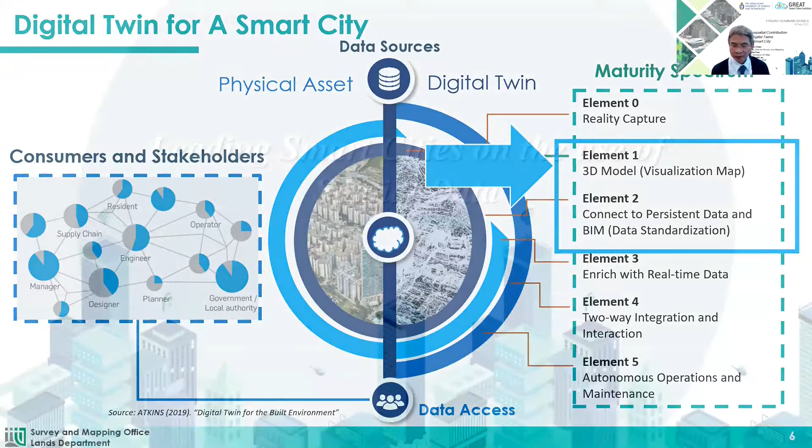Now we go on to discuss how we could use spatial data to help smart city development.

The Institute for Management Development, in collaboration with Singapore University of Technology and Design, has released the 2020 Smart City Index with key findings on how technology is playing a role in the COVID-19 era in a way that is likely to remain.

Hundreds of citizens from 109 cities were surveyed in April and May last year and asked questions on the technological provision of their city across 5 key areas: health and safety, mobility, activities, opportunity, and governance of a city.

Singapore, Helsinki, and Zurich came top in the 2020 Smart City Index. The Smart City Index ranked cities based on economic and technological data, as well as citizens' perception of how smart their city is. Hong Kong was ranked 32nd in the list.

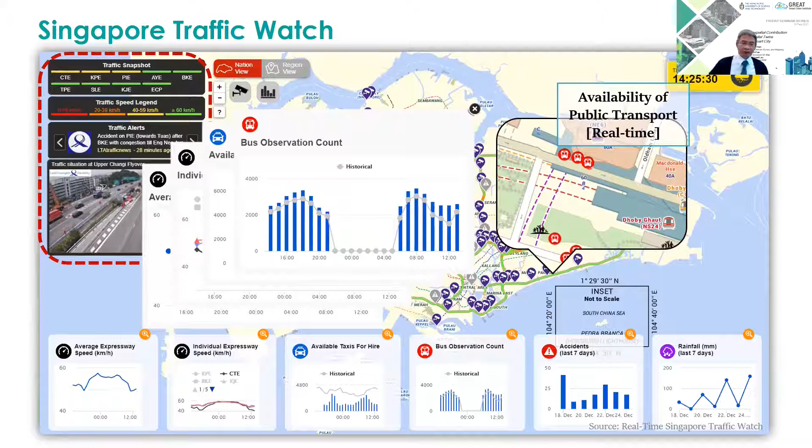In Helsinki, a Maps service shows the most suitable living areas for families with children. The easy-to-use service provides users with access to real estate listings in the desired area, transport links, as well as much-needed information on available services for families with children, such as nursery, schooling, and recreational space.

Helsinki also makes use of spatial data to monitor air quality, highlighting streets with high NO2 values, and maps showing high pollutant areas.

Zurich makes use of spatial data to support recycling. A recycling map collects over 12,000 collection points for users to identify the location of suitable collection points with different types of recycling materials.

Over 85% of data have their location attribute, which means where such data is. The value of data can be greatly enhanced if they are referenced with their location, what we call geo-reference or geo-enabled. With different kinds of geo-reference data hosted in the same platform, it supports not only search of required information, but also information analysis and exploration of new knowledge.

This diagram shows multiple spatial datasets that are required for the development of a common spatial data infrastructure.

We also need a 3D digital map to host the spatial data. Spatial data, based on agreed standards, could be stored, searched, shared, explored, assimilated, and analyzed, serving multiple purposes of different sectors.

In the Smart City Blueprint 1.0 released by government in 2017, there's a chapter on smart government with a diagram showing the generic digital framework for smart city. This framework provides the fundamental technical capability upon which smart city services will be built. Common spatial data, together with big data and open data, are considered in the data layer of this digital framework.

3D digital map is included in the government's CSDI initiative. As I mentioned previously, we need a 3D map or 3D city model to host various kinds of geospatial data.

Lands Department is developing the 3D digital map in three stages, including 3D maps for visualization, 3D maps for unit-based indoor application, and 3D maps for city modeling.

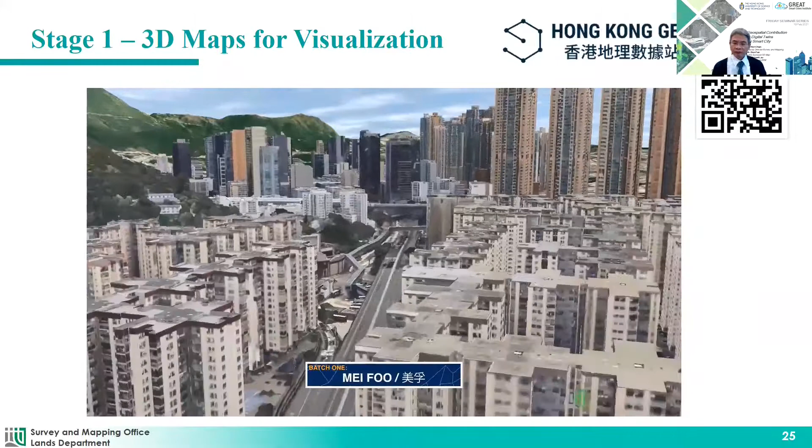The first batch of the 3D visualization map, the mesh model, was released as open data to the public on the Hong Kong Geodata Store in December 2019.

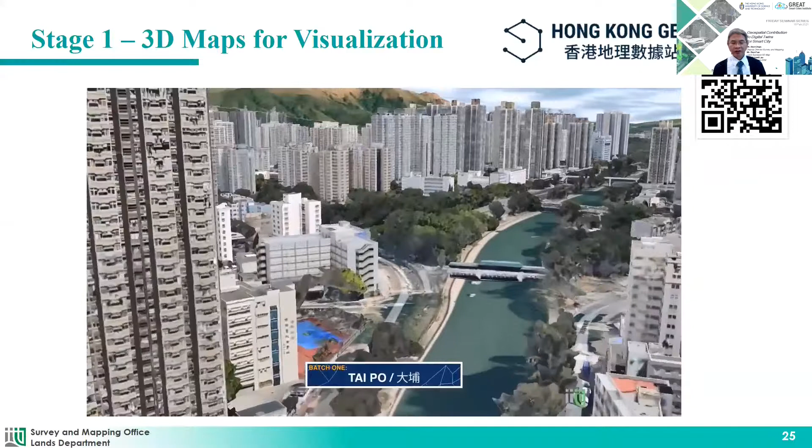By year 2023, the 3D visualization map covering the whole Hong Kong territory will include features like individualized buildings, not only a mesh layer of visualization but individualized building models - quite a lot of work on this.

By year 2023, the 3D visualization map covering the whole Hong Kong territory will be available to the general public. More details about this 3D digital map development will be presented by my colleague Ben Fan, who is working on the 3D digital map project, in the second part of today's presentation.

Another part of today's presentation is about BIM development. Government has planned to undertake various activities for the adoption of BIM technology by multiple departments. Acceptance of BIM format in building plan submission will be handled by Buildings Department and Lands Department.

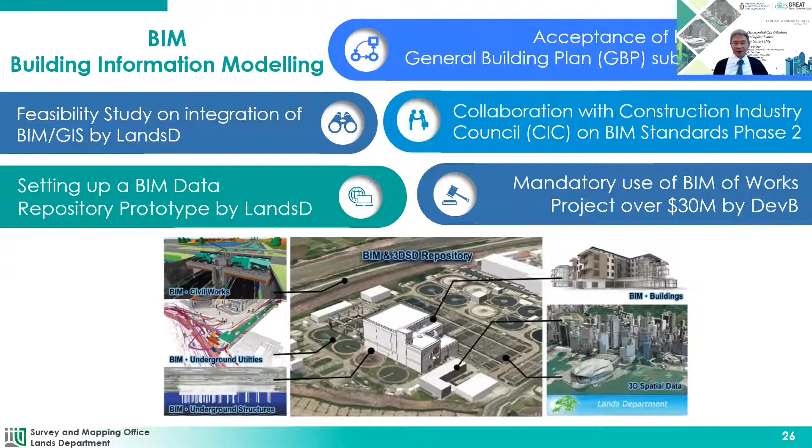BIM and GIS integration, and the BIM data repository set up by Lands Department, with a prototype or pilot in the CEDD NDA project, and also collaboration with CIC, the Construction Industry Council, on BIM standards and mandatory use of BIM in all works departments.

In Technical Circular Works Number 12/2020, which you could download from the Development Bureau website, it sets out the policy and requirements on the adoption of BIM technology, and mentions that works departments shall provide their design and as-built BIM models to Lands Department to facilitate development of the BIM data repository, and shall ensure the models are prepared for information sharing according to a harmonized BIM standard.

This harmonized BIM standard is being developed together by CEDD, Civil Engineering and Development Department, and Lands Department in a pilot project for a new development area, due for completion this year.

This consultancy service led by CEDD on the Kwu Tung North, Kwu Tung Bak, and Fanling North new development areas defines the BIM data harmonization among works departments, and will serve as a set of guidelines for future BIM data standards in public works. You could see lots of works departments participating in this project.

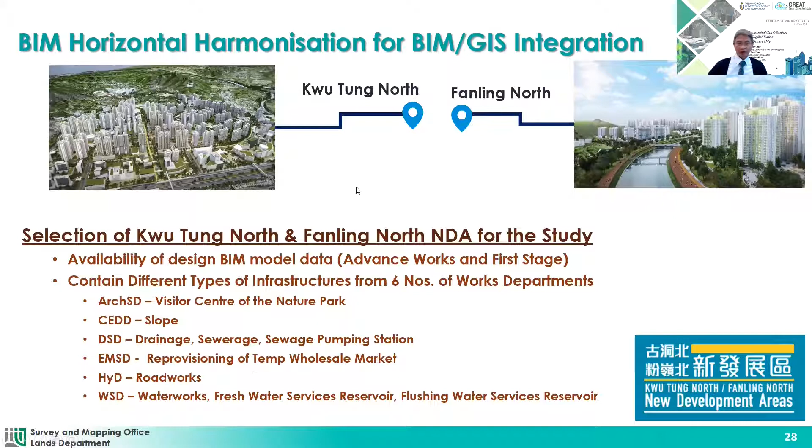The establishment of the BIM data repository system would facilitate the sharing of BIM data among different works departments, and could also improve collaboration in planning, lands, and works applications.

For the planning and management of our BIM data repository development, Lands Department has recruited a professional consultant, a quite renowned consultant, BIM Score, who is experienced and proficient in open BIM adoption and development, to recommend a roadmap of BIM data repository for Lands Department and government.

In addition, data standard, data format, and system functionality, and also proof of concept for BIM and GIS integration are also included in this consultancy.

More details about our BIM data repository and other BIM-related projects will be presented by my colleague Michael Lau, who is working in the BIM project management team, in the third part of today's presentation.

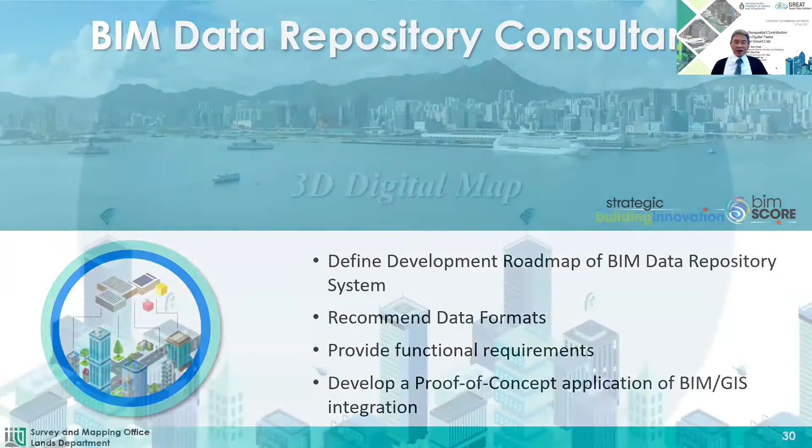Now my colleague Ben Fan would share with you details about our digital map development. So let me pass the screen for his sharing.

Thank you all for joining today's seminar. My name is Ben Fan. I'm a land surveyor from the Lands Department, and I'm now working on the 3D digital mapping project.

The 3D digital map, which is one of the building blocks of CSDI, is to facilitate opening up and sharing of government geospatial data.

When we talk about 3D digital maps, there is an article written by Professor Jantien Stoter, who is from the Delft University of Technology in the Netherlands. In this paper, she presents the state of the art of 3D city modeling in the context of broader developments such as smart cities and digital twins.

And it outlines six challenges that must be overcome before 3D data as a platform becomes a reality. They are consistency between models, standardization, data quality, data interoperability, data maintenance, and moving from utopian pilots to real-world use cases.

In order to allow for the development of advanced applications, a 3D city model should describe the geometry and attributes of all the individual elements typically present in a city, for example buildings, infrastructure, roads, water bodies, etc. In addition, relevant semantic information can be included with the geometries, such as the year a building was constructed, the number of people living in it, and the construction materials. All this information is important to optimize circular economic flows or energy consumption.

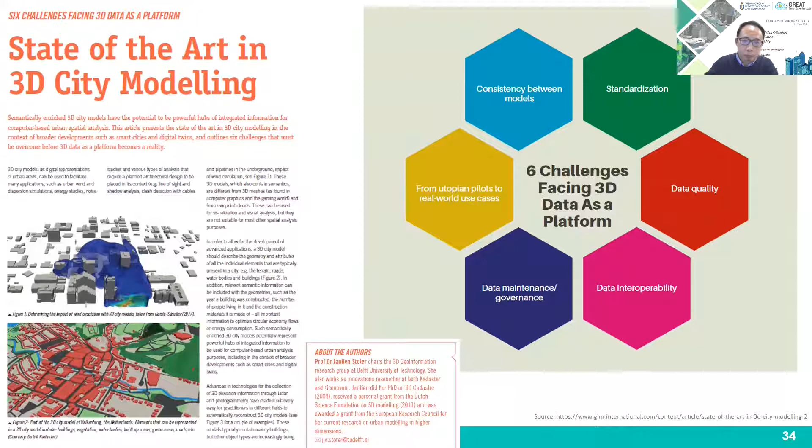The Surveying and Mapping Office of the Lands Department is the official land surveying and mapping agency for Hong Kong. We produce various types of maps and plans following the adoption of metrication policy in the early 1970s. The SMO has covered more than 3,000 sheets at 1 to 1,000 scale, and this 1 to 1,000 2D topographic map is the largest scale topographic map surveyed and plotted by SMO.

It shows a wealth of information with spot heights and contours—more than 200 map features of different kinds were defined, specified, and presented in this map. It proves very useful for many different kinds of applications, for example engineering, town planning, land administration, and industrial purposes.

So as we evolve digital maps from 2D to 3D, there are a number of aspects we have to pay attention to. For example, we have to invite international experts to develop international or national mapping standards, such as the OGC standard. We also have to do market research to find out the state of the art and technology available for 3D mapping now in the market.

And we also have to interview stakeholders, especially Hong Kong industry stakeholders, focusing on use cases, to make sure the 3D digital map development is practical and can be applied to real-world use cases.

In the future, the ultimate target of 3D digital map development is to provide an object-oriented 3D city model with a comprehensive 3D GIS database. This should be a completion of an advanced 3D digital map with thousands of standardized 3D map features, with intelligence and sufficient detail and accuracy in the form of 3D GIS, supporting the six aspects of smart city applications in Hong Kong. Of course, achieving this target is challenging, and there is still a long way to go.

There is a report from the United Nations called Future Trends in Geospatial Information Management: the 5 to 10 Years Vision. This shows how geospatial information and technology underpin national governments, and documents the increasing role that geospatial information will play as an important part of the 2030 Agenda for Sustainable Development and its 17 goals.

This report has been authored by Great Britain's Ordnance Survey National Mapping Agency, and it looks in depth at the challenges and opportunities that will impact how we connect, manage, and use geospatial information over the next 5 to 10 years. A lot of insight could be found from this report.

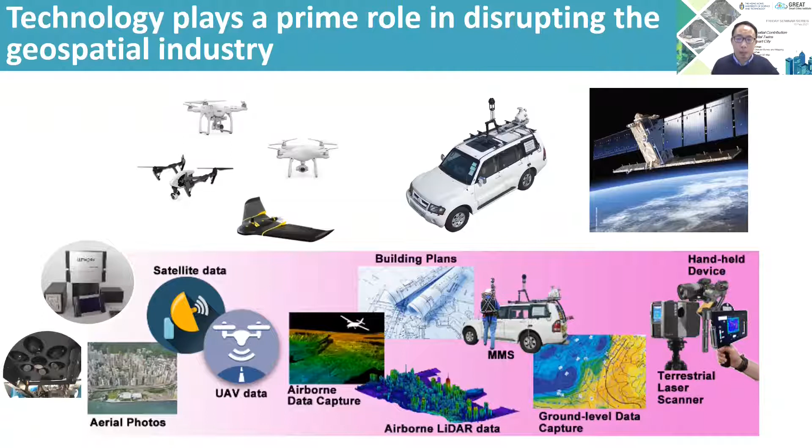Technology is the answer, but what was the question? It is always worthwhile heading back to British architect Cedric Price's famous quote in 1966, when thinking about building a smart city and what use cases of 3D maps could be achieved based on modern technology.

In fact, OGC has listed the top-level use cases of CityGML models, which can be divided into 5 main goals: archive, the creation and use of the model for the purpose of preservation of the former and current state of an environment; and visualization, generation of views of the model environment in 3-dimensional.

There is no doubt that visualization is often the best way to convey the overall nature of the model environment in 3-dimensional. You may have seen a movie called Blade Runner 2049, which displays a future vision of Los Angeles. In this film, all the 3D models created make use of realistic texture based on aerial and oblique photos, using GIS to depict the future vision of Los Angeles in 2049. This movie also won an Oscar for best visual effects in 2018.

So visualization is not only for popular engagement or simple analysis, but also for many different kinds of industries. The third use case is navigation, the guidance of people or vehicles through a model environment. Semantic structure enables both route-finding and guidance in terms of object categories that are directly meaningful to humans.

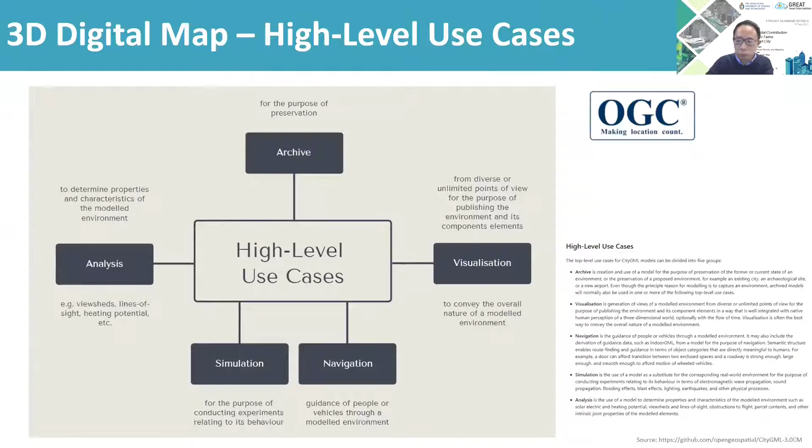Generally, 3D city models appear to have been predominantly used for visualization. However, as mentioned before, today they are being increasingly employed in a number of domains and for a larger range of tasks beyond visualization.

There is a paper written in 2015 by Dr. Filip Biljecki, a CityGML modeling expert and graduate from Delft University of Technology, now working as an associate professor in the National University of Singapore. In his paper, he documented the state of the art regarding the utilization of 3D city models across multiple domains based on a comprehensive literature study, including hundreds of research papers, technical reports, and online resources.

This paper demonstrates that 3D city models are employed in at least 29 use cases that are part of more than 100 applications. The potential use of 3D city models is immense and only limited by our imagination.

Consumers rely on the accuracy of the position and navigation capabilities of their mobile phones. However, we all know that multipath exists in urban canyons, especially in the Hong Kong situation. The biggest location issue is inaccuracy in dense urban areas, such as wrong side of the street with many skyscrapers. Lately, Google has improved Android's urban GPS accuracy using 3D building models as reference for GPS corrections.

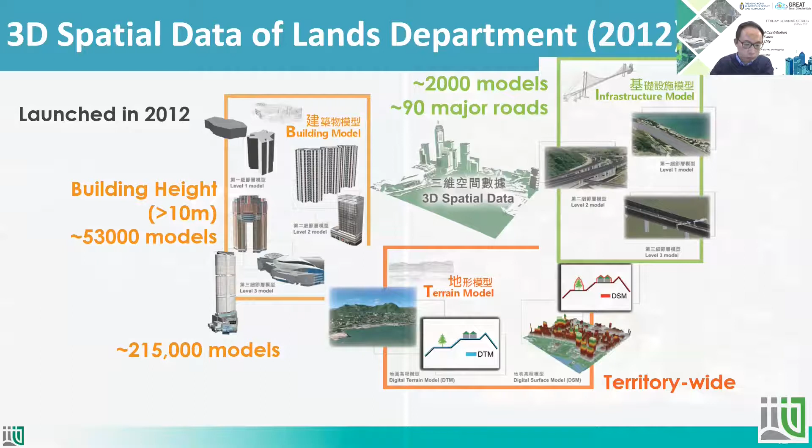Let me ask one question. Do you know how many 3D building models from this 3D spatial data set were created with photorealistic textures and represent as a miniature of the building? Are they all 100% photorealistic, or 15%? In fact, the real situation is less than 10% of this 3D spatial data set are photorealistic, meaning more than 90% of these 3D building models are in fact 3D building blocks without texture.

So this is the current situation when we talk about the 3D individual building models, what we have right now in Hong Kong, or in Lands Department.

As mentioned, the 3D digital map, which is one of the building blocks of CSDI, is to facilitate opening up and sharing of government geospatial data. To meet the increasing needs of 3D digital map applications and better understanding of multi-level spaces of modern cities like Hong Kong, the government aims to develop the high-quality 3D digital map by phases and strives to cover the whole territory by the end of 2023.

This 3D digital map project consists of three parts. The first is the full-fledged 3D visualization map. The second is the 3D indoor map for 1,250 buildings. And the third is the 3D pedestrian network.

This initial set of 3D visualization map covers the Kowloon area and also the built-up areas in the New Territories. Only 20% of the area is covered so far from this data set. The government aims to develop the high-quality 3D digital map by phases and will cover the whole territory with a full-fledged 3D visualization map by end of 2023.

How about Singapore? In 2016, they did 3D national mapping using aerial oblique images, and the same year they also surveyed the whole country at street level. In 2018, they built a Virtual Singapore platform with abundant 3D spatial data for different kinds of smart city applications. As Spencer mentioned at the beginning, Singapore ranked number one in the Smart City Index in 2020.

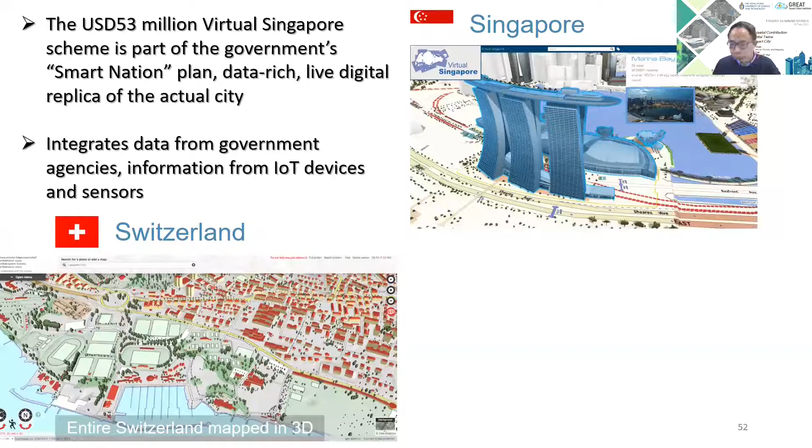They also integrate data from government agencies and information from IoT devices and sensors, in various 3D formats including CityGML. In Switzerland, the one and only country so far to have switched entirely to 3D for its national object-oriented topographic database—according to the Swiss Federal Office of Topography, Swiss Topo, they spent 10 years building this 3D object-oriented topographic database, with the last objects completed in 2019. Swiss Topo notes this whole-country 3D object-oriented database created low extra cost and many benefits for them.

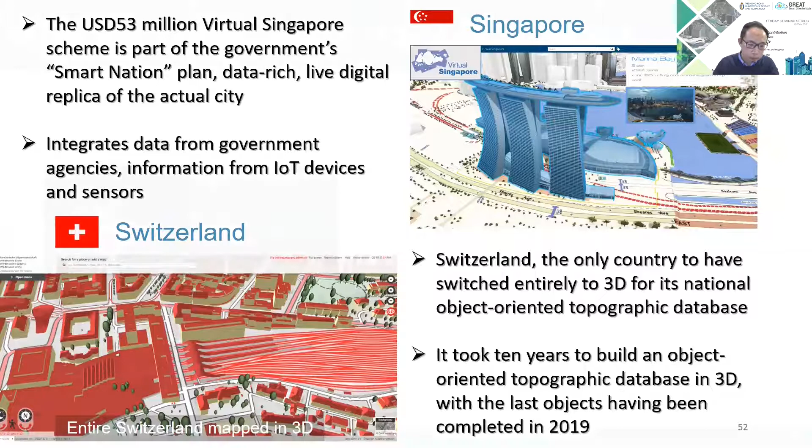And how about mainland China doing in 3D mapping? In fact, many major China cities have already created 3D photorealistic models. From the perspective of Professor Li Deren, a very famous expert in photogrammetry and remote sensing in China, he thinks that China is mature enough to develop a whole country 3D photorealistic model.

The whole country covers an area of 9.6 million square kilometers. He thinks that this is a good time to build the whole country's 3D photorealistic models.

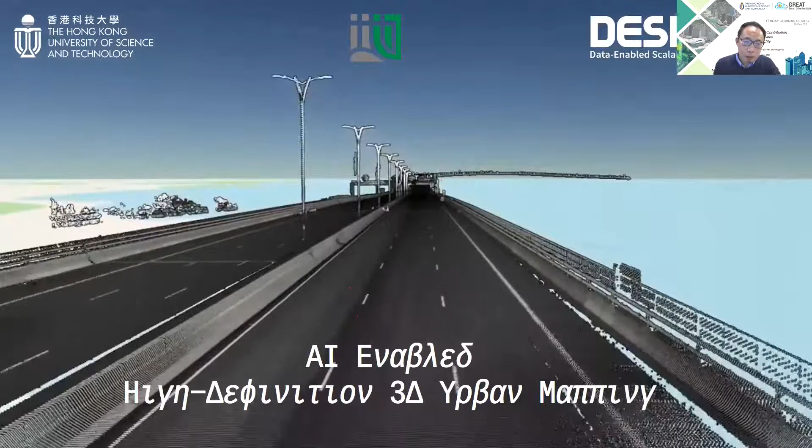We gave a trial study to HKUST's DESI lab, courtesy of Professor Wen. They are using artificial intelligence to detect our MMS point cloud data so that all features can be extracted automatically in a very short time. This is very efficient and very intelligent.

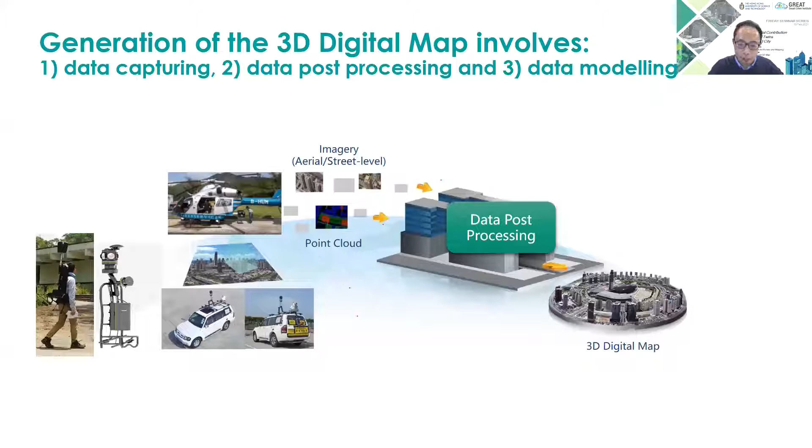Generation of the 3D digital map will involve data capturing, data processing, and data modeling. We strive to organize and apply the best of our energies and skills to do that. The aerial photos, on-ground captured images, and laser scanning point clouds will be processed to generate 3D photorealistic models to represent the shape, appearance, and position of various types of features, including buildings, infrastructure, and terrain.

From the consultancy study, three key strategies were identified: incremental implementation, outcome-based rather than output-based approach, and setting out best practice and examples.

Incremental implementation means various aspects of digital mapping and technical capabilities can be tested using the current pilot area project before full-scale implementation. Lessons learned and experience gained from this can be carried forward into development of other regions. So in the current pilot area, we will develop the 3D digital map in two stages. Stage 1 is to create the 3D photorealistic models, and stage 2 focuses on the semantic models, aligned to the international standard, that is the OGC CityGML standard.

Outcomes-based, not output-based: the mapping product would address user expectations and provide deliverables to directly address applications of 3D spatial data by wider users. So the 3D digital map we provide will focus on use cases, not just a single product that people don't know how to use. More applications are shown in the following video.

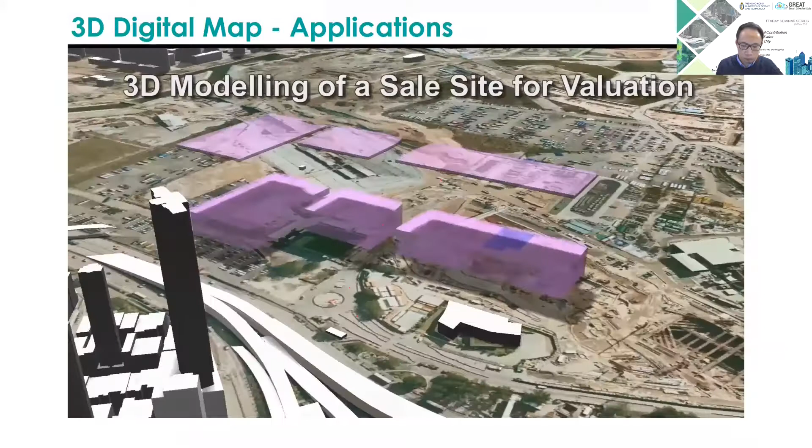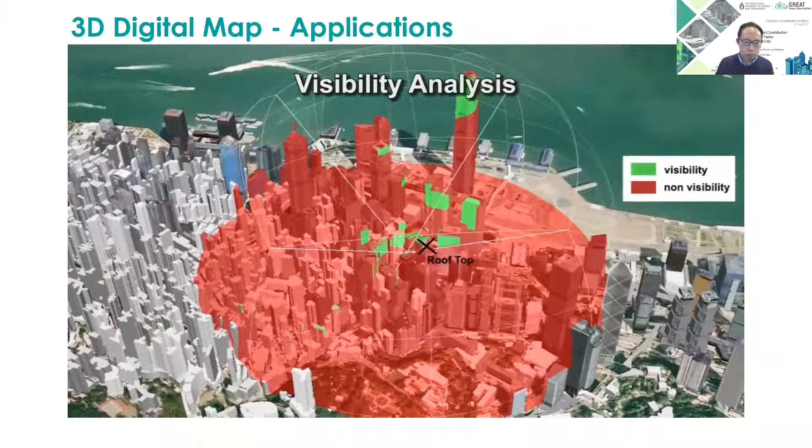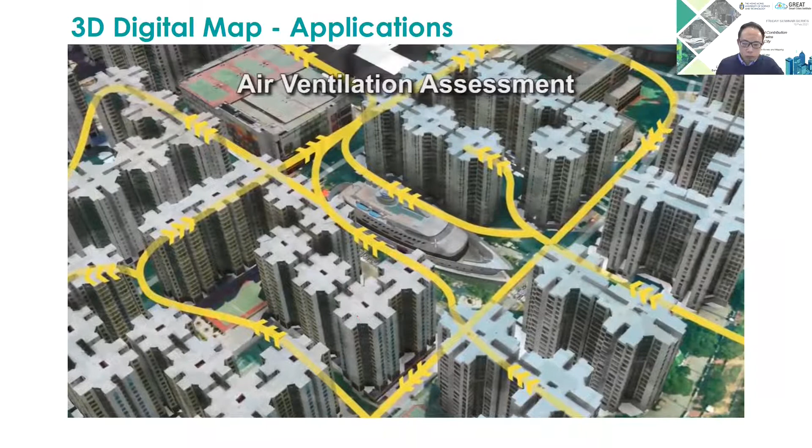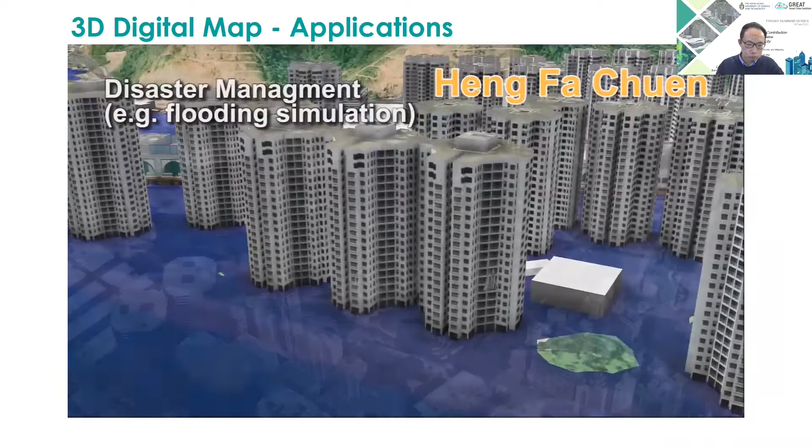Introducing 3D applications: 3D modeling for site valuation, estimation of solar irradiation, transportation and navigation, classifying building types, visibility analysis, estimation of shadows cast by urban features, estimation of noise propagation in an urban environment, city planning and design, reconstruction of sunlight direction, emergency response, lighting simulations, air ventilation assessment, routing, disaster management such as flooding simulation, green space assessment, underground modeling, telecommunication placement, and land valuation.

Setting out best practice: the 3D digital mapping technical specification intends to ensure standardized and consistent quality of output using best practice standards. This experience gained from the Kowloon East pilot project provides an opportunity to reach out and participate in related organizations for further development in various aspects of 3D related applications.

Our goal is to complete the project for the whole territory of Hong Kong by 2023. That challenge is one we are willing to accept, willing to face, and intend to do the best we can.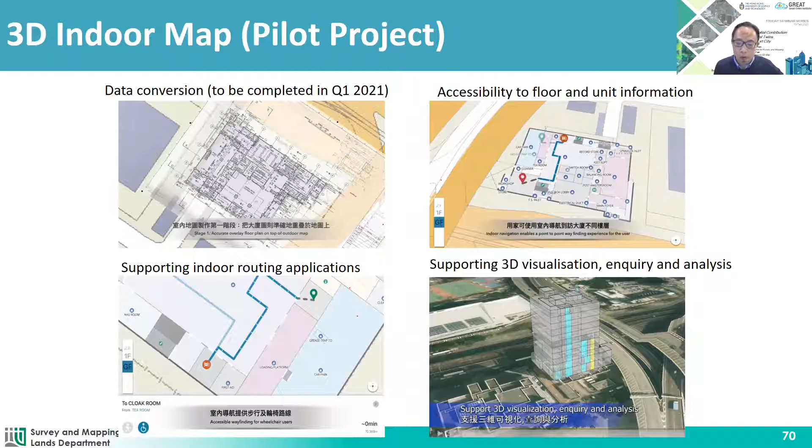This will also serve as a reference for further developing the 3D indoor map for 1,250 buildings by 2023. Major government, institution, and community facilities, for example government offices, hospitals, community halls, schools, clinics, and landmark buildings that are accessible to the public, will be given priority in the list.

Let's take a look at the video to show how we create a 3D indoor map. In fact, we are using building plans. All these building plans come from the Buildings Department, the Architectural Services Department, or the Housing Department. We use these building plans to digitize into 3D form, 3D units, and also generate the 3D indoor network.

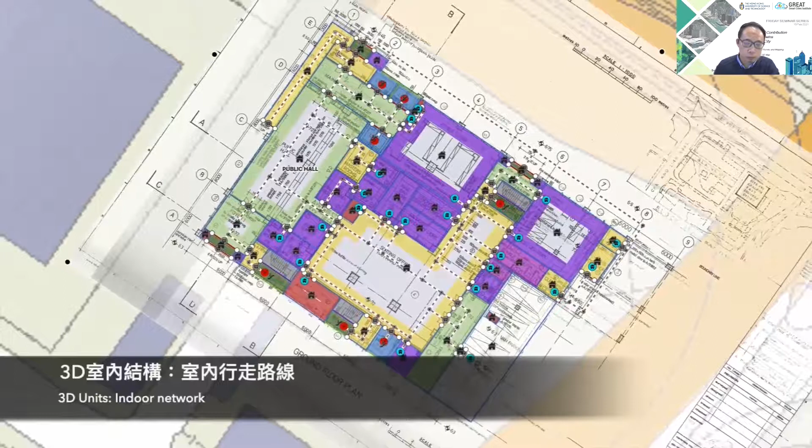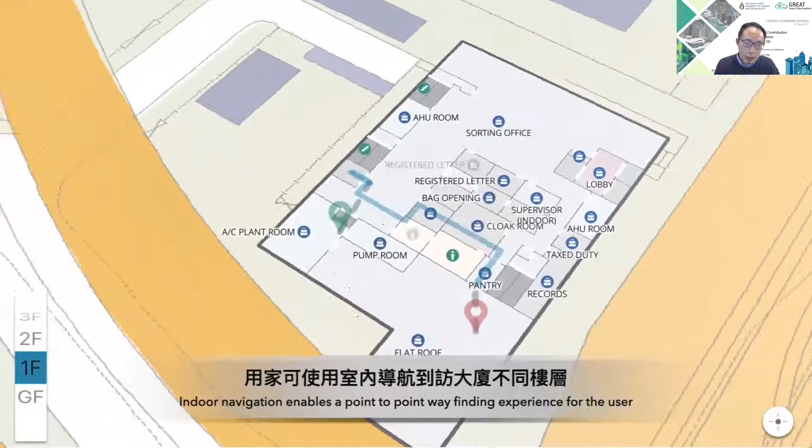This 3D indoor map supports navigation. Navigation enables point-to-point wayfinding, not only for the general public user, but also for people with disabilities or visual impairment. This 3D indoor map also supports a mobile version, so that if you bring a mobile device into the indoor area, you can navigate as you want.

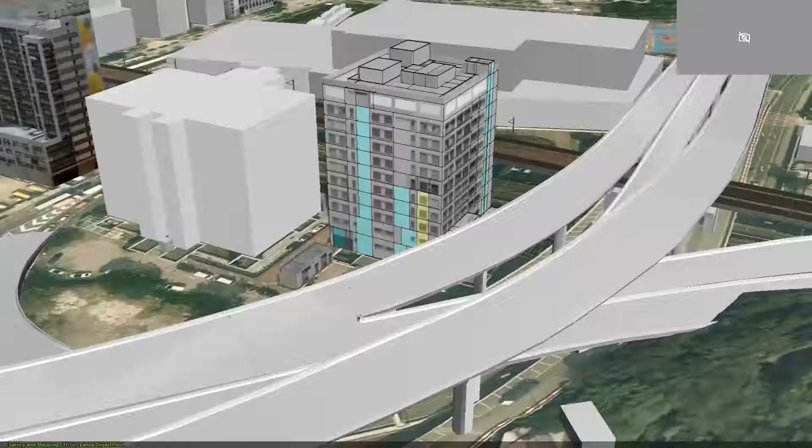And this is not only 2D. In fact, this 3D indoor map is fully supported to present in 3-dimensional. So different kinds of 3D visualization, inquiry, and analysis for this 3D indoor map are already supported.

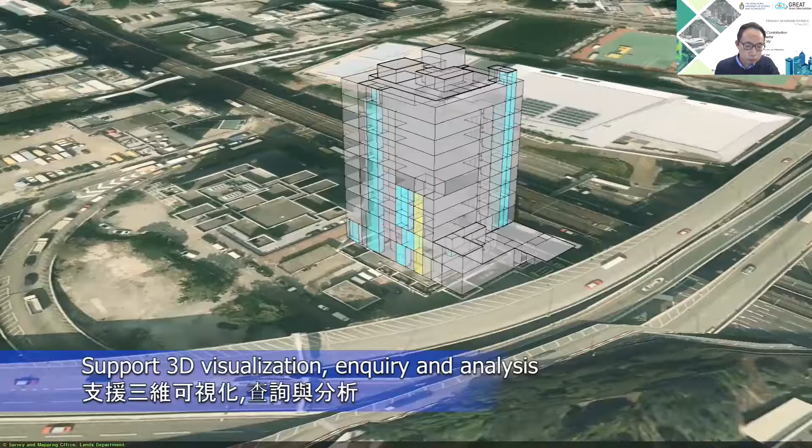Any attributes or related asset information related to the unit could be linked to this 3D indoor map to facilitate different kinds of indoor map location-based applications. Of course, there are many different kinds of potential applications, for example, integration with IoT systems. We create a 3D indoor map of the site or building with real-time sensors using IoT technology, and they can easily directly link the sensor with their asset information to do facility maintenance or other kinds of building analysis based on the 3D indoor map.

Also, there are many different kinds of applications empowering use cases on top of 3D indoor maps. For example, for people with disabilities or people with visual impairments, for smart mobility, for new site location-based analytics, or for fire evacuation emergencies, or for building management or facility management to improve operating efficiency.

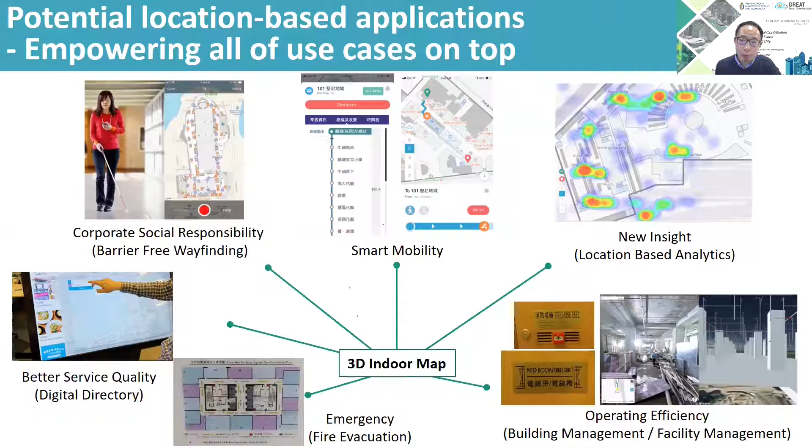In line with the Smart City initiative of promoting walkability and connectivity, the 3D pedestrian network was designed to support navigation services and meet the special needs of people with physical disabilities. The Transport Department's HKeMobility mobile app has already adopted the above 3D pedestrian network to enrich mobility information.

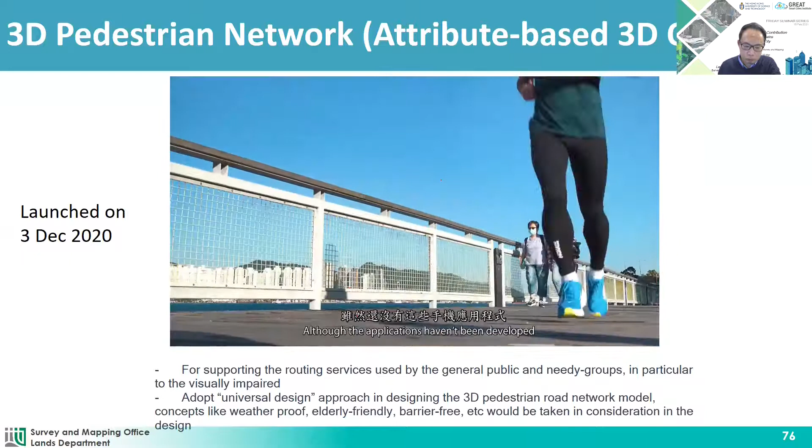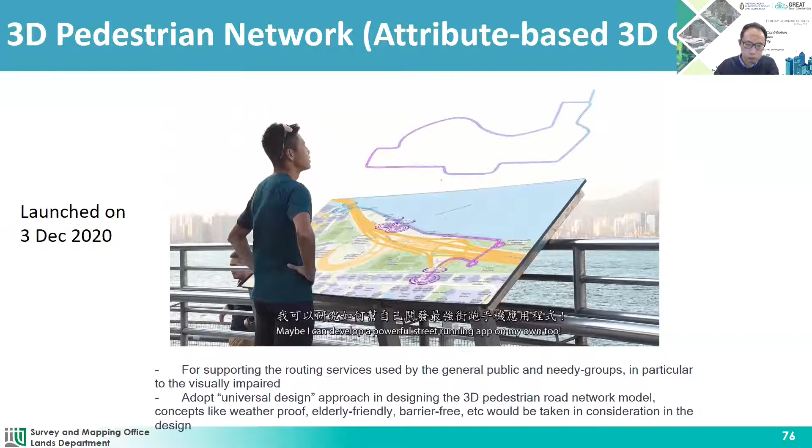The first one is 'everything happens somewhere,' the new wave of data creation. Over the next decade, the technologies and data creation methods that will have the greatest impact on the geospatial industry are mobile data collection methods, crowdsourcing for real-time data collection, and social media platforms.

Second is aerial mapping. Traditionally, we use aircraft equipped with large format aerial survey cameras, which continue to play an important part in national aerial survey programs. But nowadays, drone and UAV technology has become a main popular trend due to decreasing costs and increasing demands for timely, accurate, and high-resolution data.

Also, this UAV can be equipped with different kinds of sensors, for example, multispectral sensors, hyperspectral, thermal, airborne LiDAR, or oblique cameras. UAV can be described as the single most important technology to revolutionize the aerial mapping industry.

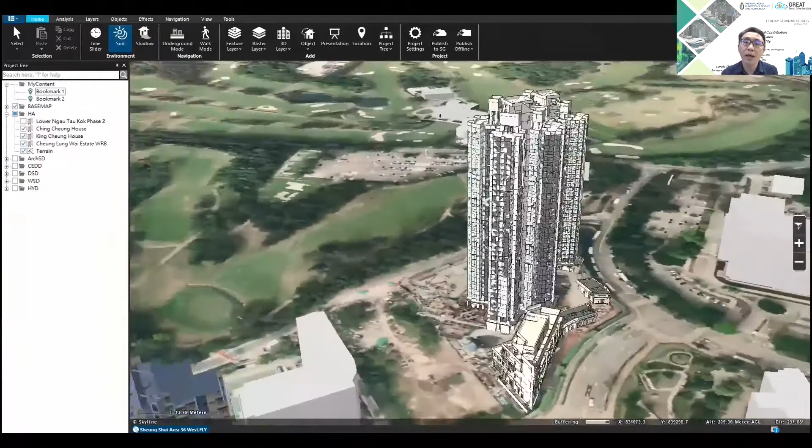In the viewer, you can see that the BIM data can be visualized easily, and not just the BIM data, it also tightly integrates with our 3D spatial data, so people can do 3D navigation very easily. Not just simple navigation, some spatial analysis can also be conducted in this viewer, including visibility analysis and shadow simulation.

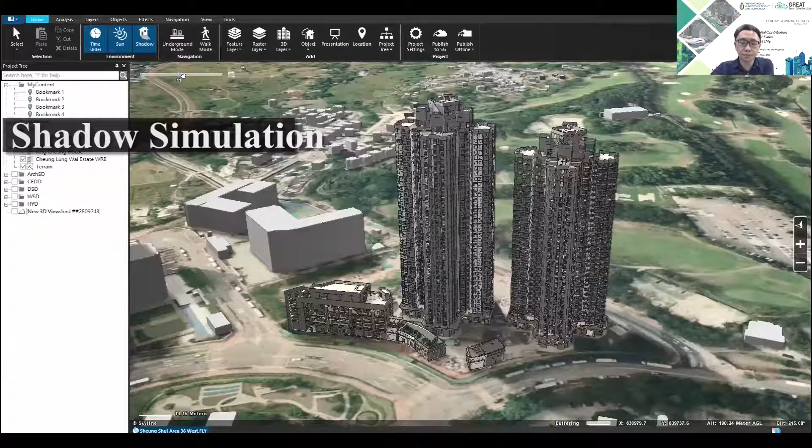From the BIM data repository prototype and continuous data handling of BIM, we have identified some key issues that hinder the data sharing of BIM. Different departments use different tools, approaches, and practices for handling or creating BIM data. So once we collect it and want to put it together, we find that the data is fragmented, and we need to apply different tools and approaches to extract and manipulate the data.

One of the key issues is the lack of standardization among the data. These problems hinder the sharing of BIM data across bureaus and departments, and will also be a technical constraint for the coming integration of BIM data and the 3D maps of the Lands Department.

Now I would like to share with you the roadmap of our territory-wide BIM data repository.

Most of them use native formats for creation of the BIM, like Revit or Civil 3D, and a data conversion engine will be developed and used to convert those native formats into an open format, IFC. That open BIM format will be further converted into an open GIS format, CityGML.

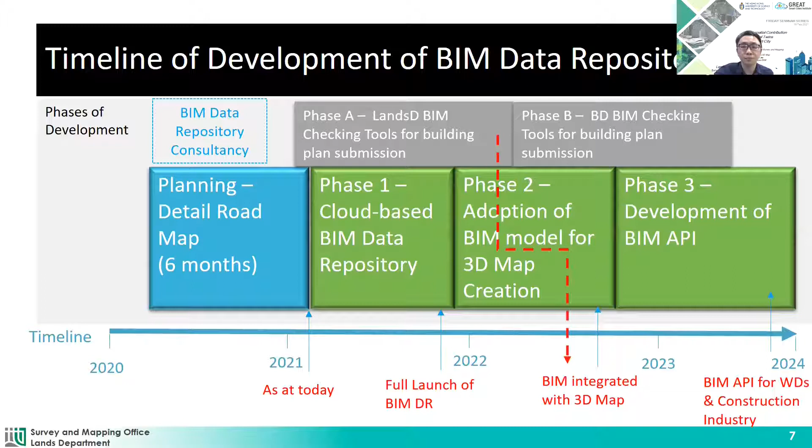Other than understanding our operational and business needs on BIM data, the consultants made reference to 3 consultancy studies for making recommendations. The first is from CEDD on the BIM horizontal harmonization consultancy. The second is the Digital Hong Kong consultancy from CIC. The third is our internal 3D project led by my colleague Ben Fan on the 3D map.

Now I would like to give you some brief understanding on the scope of the BIM horizontal harmonization study. The scope of study is to carry out a horizontal harmonization study to formulate and align the BIM standard under the first phase development of the Kwu Tung North and Fanling North NDA.

It will revamp the design models under the first phase development of Kwu Tung North and Fanling North NDA in accordance with the aligned BIM standard. Before having this study and the guidelines, many models were already developed at the design stage, so through the study, a horizontal harmonization was developed, and the design models have to be revamped according to the defined standard.

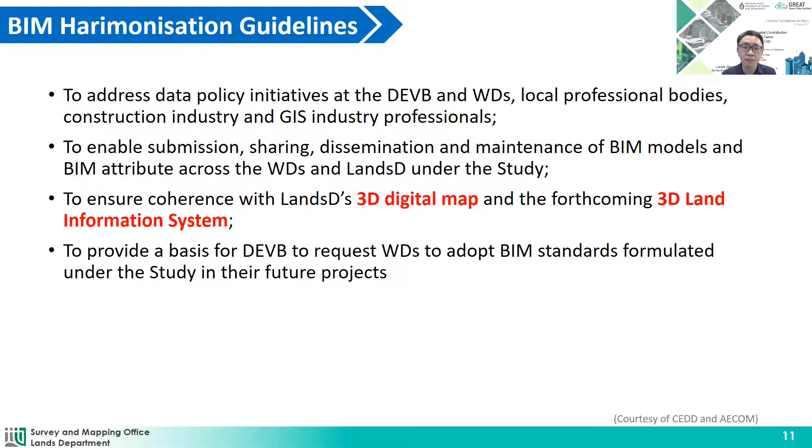It forms a base for the Development Bureau to request works departments to adopt the BIM standards formulated under the study in their future projects. So for the study, we would like to have these guidelines available, and then coming BIM models will be aligned with that standard so we can manipulate the BIM data in a more efficient way.

Because different users have different needs for the BIM models, they may not necessarily need the full BIM of each model. The tools can help them select the right elements for their needs, so some BIM models will be extracted into individual shareable BIM models, and those shareable BIM models will then be further converted into corresponding CityGML format.

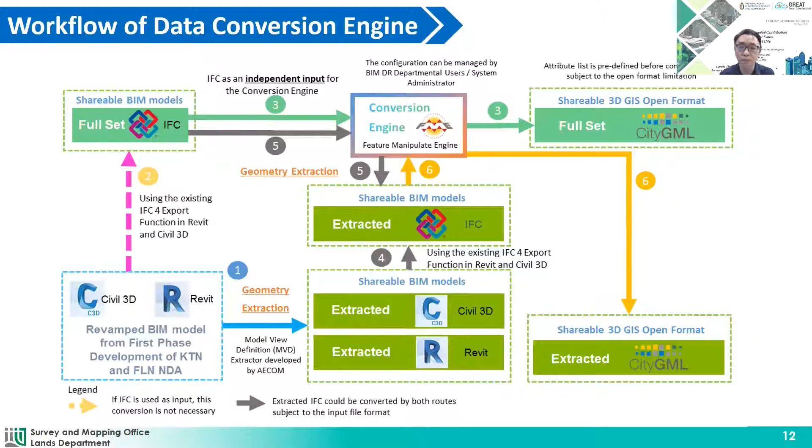Once the data is converted, a centralized BIM data repository will be developed to centrally manage those BIM data. A 2D map and also a 3D visualization platform, quite similar to what you see in our prototype, will be developed to enable users to easily identify where BIM models are available and then extract the data for further manipulation.

Customized web applications, including many dashboards, will show statistical figures on how the BIM data is being adopted and the data upload progress. That BIM data repository will be handed over to Lands Department after completion.

Now I would like to share with you some brief information on another consultant study from the CIC on the development of Digital Hong Kong. The study's main purpose is to find the best approach for the industry to adopt 3D digital map data to better support their construction life cycle. It will collect the 3D and BIM data use case requirements of the construction industry in order to tie in with the smart city initiatives.

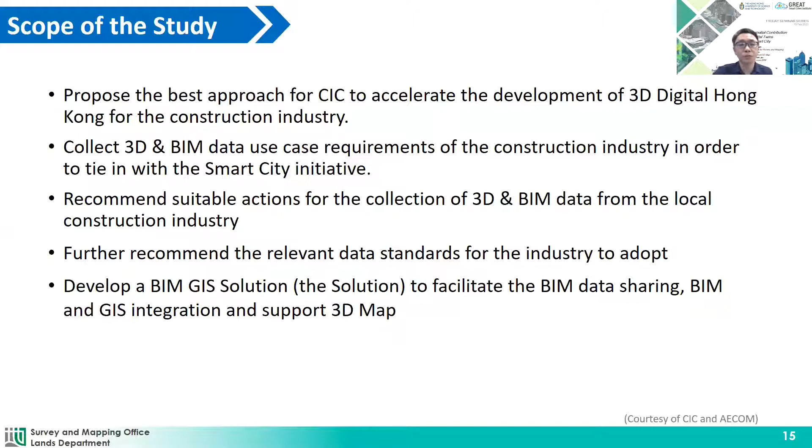Some recommendations will be provided for the collection of 3D and BIM data from different construction industry organizations. It will further develop some POC to prove how the BIM data and the 3D GIS data can work together to benefit different scenarios. By consolidating feedback from stakeholders and industry professionals, the top 10 cases are recommended to demonstrate the potential applications of adopting 3D spatial data and BIM data to streamline the operation of the construction industry.

I would like to select two cases to give you a bit more detail. The first one is the underground utility study and space management, and the other one is premium assessment and property valuation.

For the underground utility situation currently, the underground utility data is not really well managed. The data may not be reliable, and the data format varies — it is not standardized. So it is not easy for contractors or organizations to integrate the data together for better planning. That means they need extra time and cost for planning and repair work, which will definitely delay construction program planning and postpone smart city development.

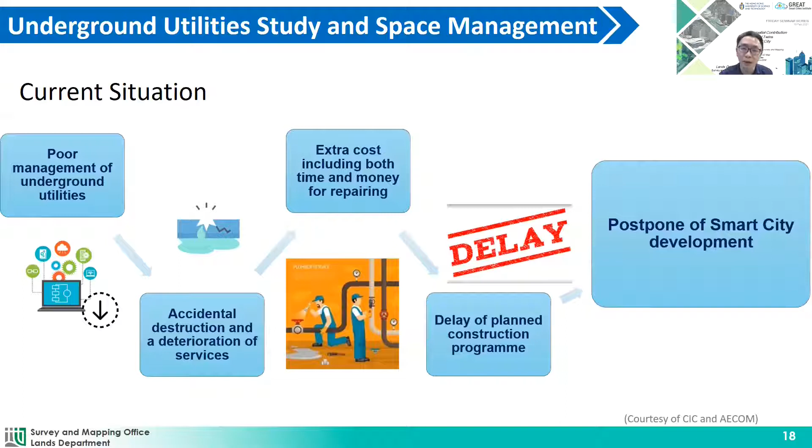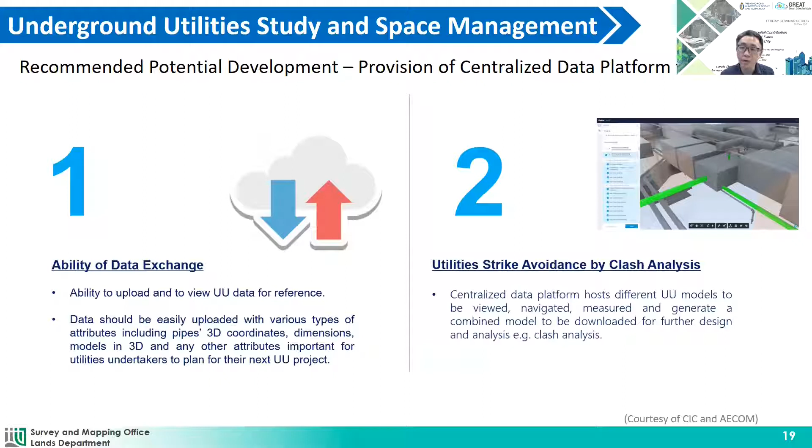Based on this scenario, the consultant has made recommendations that a potential development may be considered — to develop a centralized data platform for sharing. With that centralized platform, different underground utility users or owners can easily upload and download data. When they have any construction project or repair work to be done, they can simply go to the area they're interested in and download the corresponding data to perform different types of analysis, including collision analysis.

This short video demonstrates how the data can be put together to perform more effective and reliable collision analysis.

As different organizations use different approaches, like different legends, maps, or annotations for handling their underground utility records, a standardized format is necessary to fit into the digital data platform so as to create that centralized environment. OGC has already worked out a model called the Model for Underground Data Definition and Interchange — an initiative intended to provide an open standards-based way for sharing information on underground utilities. That model can be considered for implementation or as a reference for the coming centralized platform development.

Another case is premium assessment and property valuation. Land premium is one of the most significant financial incomes of the Hong Kong government, coming mainly from land sale, lease modification, and land exchange. Various reference data are required for the industry practice of land premium assessment and property valuation, and this data comes from different systems and in different formats.

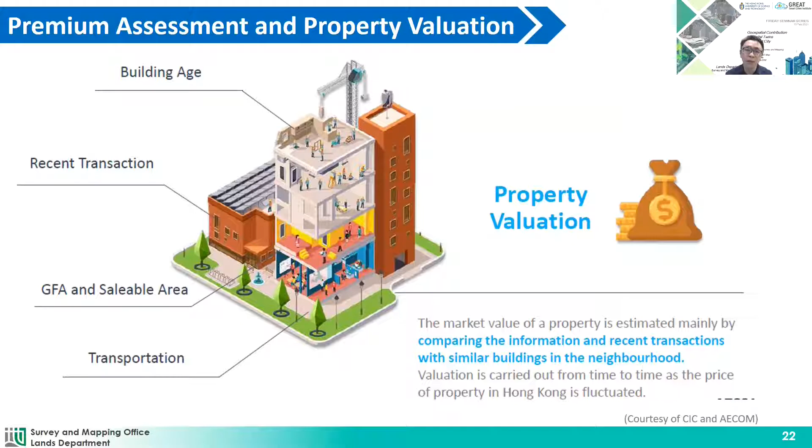Currently, in total, land or property owners have to go through three different online systems to inquire, purchase, and obtain property details. The Land GeoInfo Map can be used to get the boundary of places. The GeoInfo Map will redirect users to the Integrated Registration Information System, IRIS, established by the Land Registry, to purchase owner details, transaction records, and the property registration number.

However, the records are not really directly linked to each other. That means once users access IRIS, they have to re-input the address to find the right records. Property information like building age and permitted occupation purpose can be further purchased from the Property Information Online System by the Rating and Valuation Department. Again, they need to input all the searching criteria to get the right information.

So the consultant suggests a potential improvement may be considered — to develop a 3D web-based property information platform. The data should be standardized in a more interoperable way so that it can be easily linked with each other. Regarding privacy, different access rights can be granted to different users: for the public, some basic information can be offered, while for professional or government users, more sensitive information can be offered, like tax records.

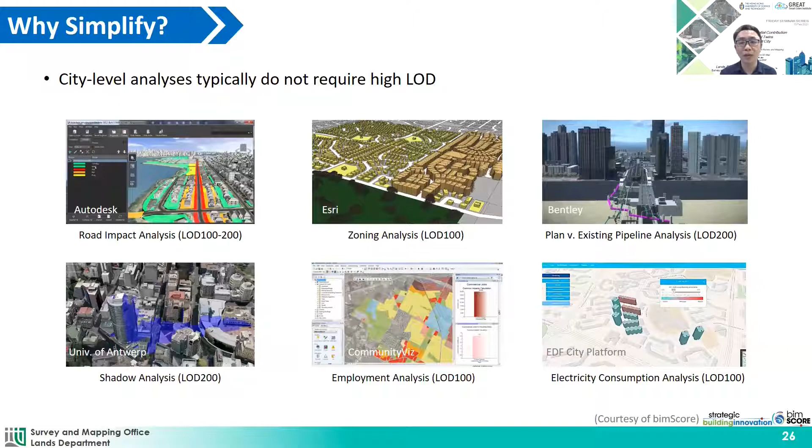Another example is that when you're doing construction work, we may want to have some tracking on the workforce. Again, we don't need to have full BIM data to make this operate effectively. We can simply select the information in terms of geometry and informations to perform the tracking.

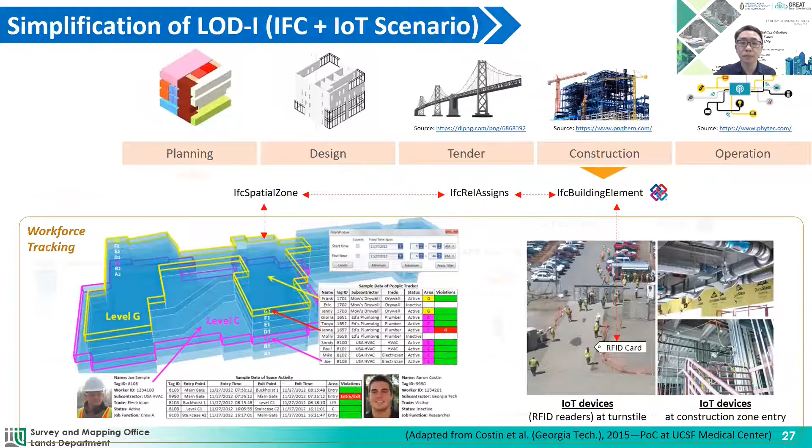For instance, performing the electricity consumption analysis, again, we don't need to have the LOD 300 because the analysis time may be too much and the result will not be significant when comparing with the low LOD. So we can simplify the LOD 300 with conversion tools to LOD 100 and then perform the analysis.

The recommendations also apply to the top 10 cases that were worked out in the CIC consultancy study. You can see that the top 10 cases can be applied with different LOD levels.

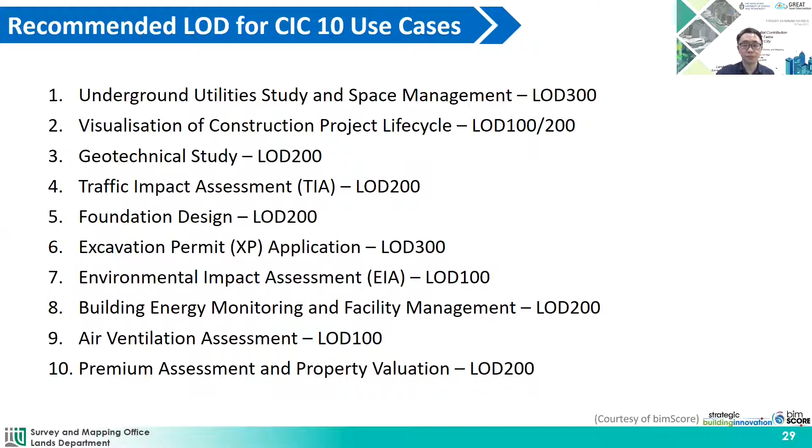Now I would like to share with you the recommendations on the BIM data repository development. Timestamp information is essential for making the right decision. So the consultant recommends us the BIM data repository to be developed as a 4D-based decision support system. With that system, we can link up with different types of data, including the growth of population, jobs, construction workers, energy demand, etc., to have better planning and to get more insights on the city issues. So the government leaders and the city planners can establish better mid to long-term strategies.

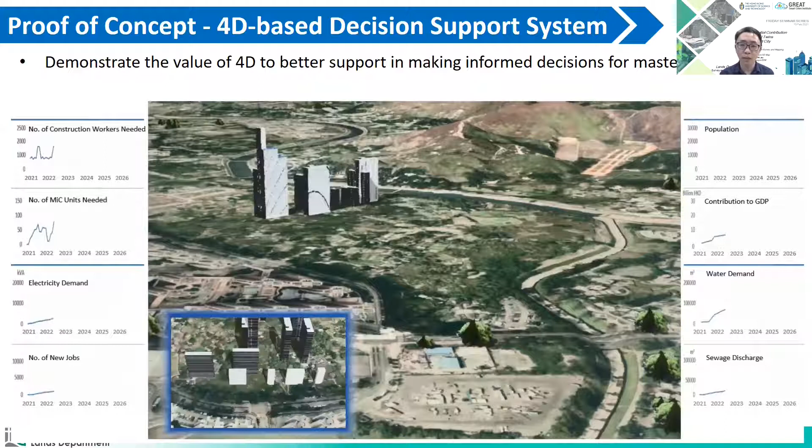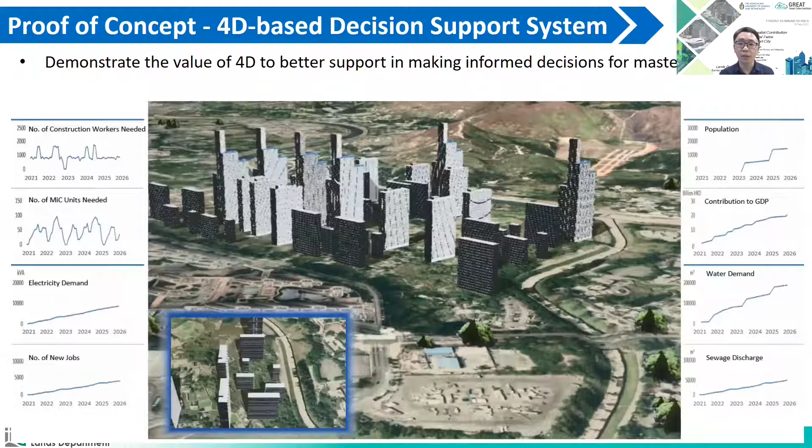This video shows a proof of concept developed by our consultant to demonstrate the value and power of the 4D-based decision support system. You can see, again, in the construction sites, we can have an understanding on what construction will be developed first and what will come in, and the dashboard at the sites demonstrates the impacts to things like the population, the water demand, or the number of construction workers needed. So we can understand which stage will be more demanding, for example, more demanding of the number of workers, so we can have better resource allocation to address the needs.

And this is the vision of the BIM data repository. So one of the key things is that the platform should be developed based on open technology that runs on open BIM and OpenGIS data. The key question now is that the government agencies hold the key to the data and don't really need to rely on a particular technology. It is a technology neutral environment.

Of course, we understand that different parties will make use of different tools like Revit, Civil 3D, or ArchiCAD to create the BIM data. So that original data source should be well managed and maintained. But we have to ensure that those native data can be converted to an open format without any data loss, so that we don't need to stick to a particular technology, and we can keep evaluating and adopt the right tools for the right job.

The whole platform should be scalable, shareable, and serviceable. What does that mean? Scalable means the system can be easily scaled up to support different users or different nodes. And the data, because we are adopting an open format, is easily shared with each other. We will adopt a web services approach to make the data and context easily shared between different applications and systems.

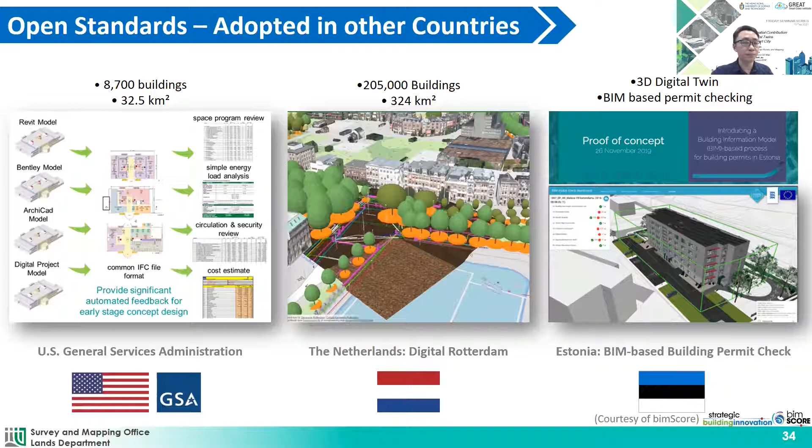As mentioned, we have scheduled our whole development into 3 phases, and I will give you more information of each phase. The first phase is to develop a cloud-based BIM data repository.

Putting the BIM data repository system on a cloud environment will ensure the system's scalability and sustainability. It also enables the BIM data to be easily shared and collaborated on. In the traditional approach of handling BIM data, it deals in a file-based approach. We would like to go further to make the BIM data managed in an object-based approach. With that approach, we can easily support the integration with GIS data in a single environment.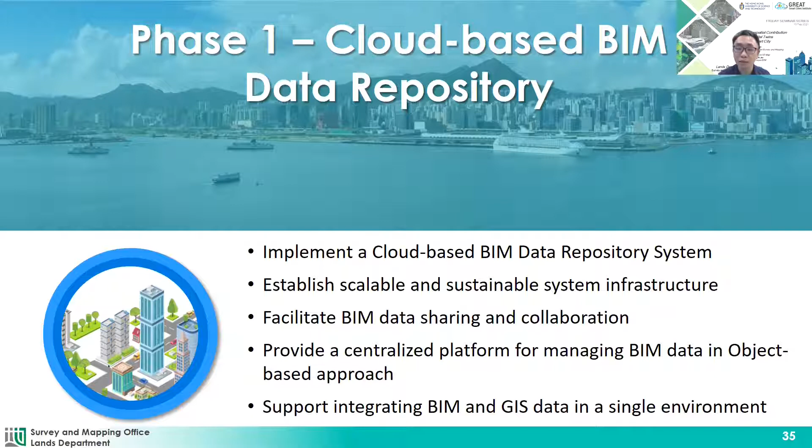And now, in our BIM data repository, we will further manipulate the data by converting the file-based BIM data into an object-based approach. With that approach, we can easily do data validation, query, and extraction for common 3D maps.

And the BIM data will be further converted into the OpenGIS repository in CityGML format. These two data repositories will work together and create a single 3D GIS viewer, consolidating both BIM and GIS context. All this content can be shared through web services to facilitate common data sharing and integration.

Phase 2 will be the creation of the 3D map with BIM. As mentioned, with BIM we already have the skill set on how to manipulate the BIM data and extract it in an object-based approach. We can make use of these elements for the creation of 3D maps.

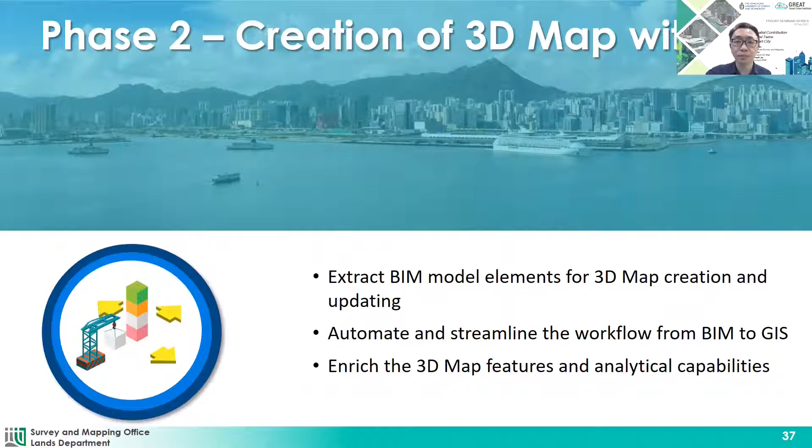With the 3D digital map combined with the BIM context, it will be beneficial to the construction life cycle in different stages. Starting from the planning and design stage, they can use the data to support the feasibility study. During the construction stage, they can make use of it to perform optimum route finding or

progress monitoring with the integration of IoT and UAV. And for operation and maintenance, they can make use of the 3D indoor map to perform inspection and asset management.

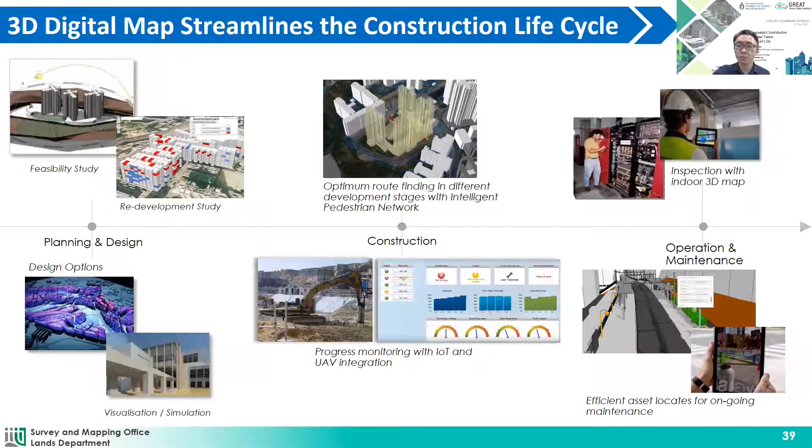In phase 3, we will develop the BIM API, making reference to our existing map API. With the map API, users can easily use our 2D map data, and coming will be 3D map data. We would like to apply the same technology to BIM.

So we use the API protocol to facilitate the sharing of BIM context. We understand that working with BIM may require different advanced tools to manipulate the data. But with the BIM API, developers do not need to have sufficient knowledge and tools on handling BIM. They can simply use the API to get the context they want and create and develop any innovative applications with the BIM context.

Here's an example: in the center, you find a very rich data BIM model, but users may only want to extract or be interested in particular elements, like the walls, floors, or stairs. Through the web API, they can do that by just passing their request to the system, and the system will return the right elements to them.

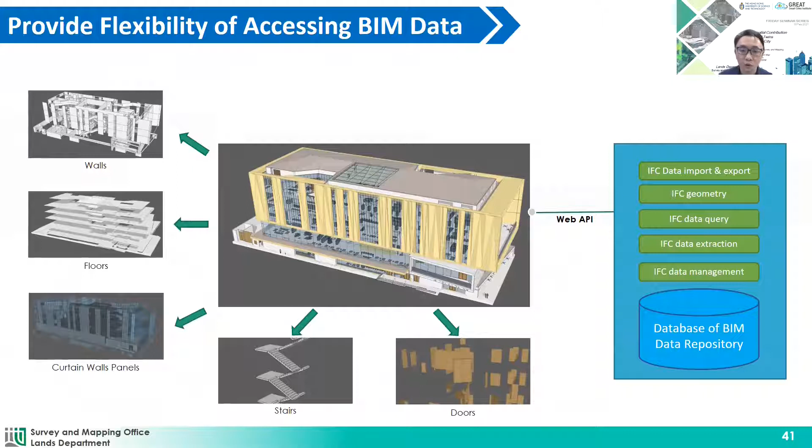So we think that these three phases come together to create a digital twin of Hong Kong. Starting from phase 1, we established a centralized BIM data repository for collecting all the BIM records, then put it into an object-based approach. In phase 2, we make use of BIM data to create 3D map elements. And in the third phase, we further extend the adoption and sharing through the BIM API.

Now, I would like to share with you the new development of building plan checking tools.

Currently, Lands Department receives electronic building plan data in CAD format from the authorized person of the developers. With BIM technology, they will now use BIM to create a general building plan and calculate the gross floor area, and they could submit the BIM models as supplementary information to the Lands Department. Our building plan unit is developing a new checking tool to facilitate the checking and approval process with respect to these requirements based on the BIM data.

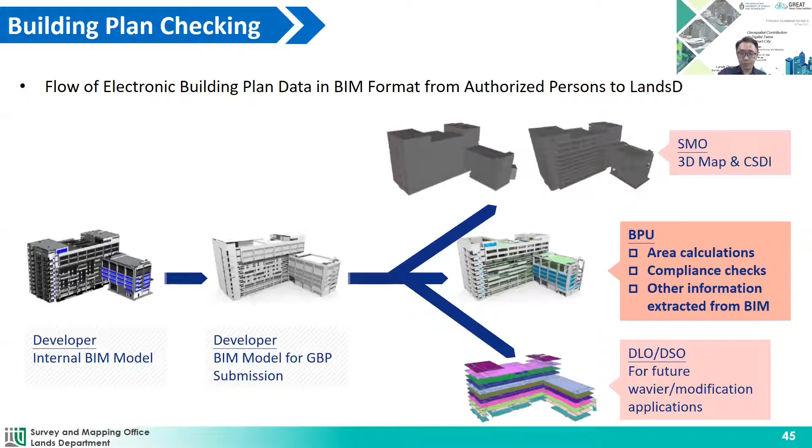Here is the project program of the building plan checking tool development. This project is a joint development between Lands Department and Buildings Department. Currently it is in the tendering stage and is targeted to be awarded in March this year. The first phase will likely start in March this year and complete in June 2022. Phase 1 will focus on the requirements of Lands Department, and 2 major deliverables will be provided.

The first is the new practice notes and BIM data guidelines. The second is checking tools in the form of BIM software plugins—two plugin tools will be developed, one for Revit and one for ArchiCAD. In the second phase of implementation, it will likely start in March 2022 and be complete in June 2023, focusing on the requirements of Buildings Department.

We expect that the newly generated practice notes, guidelines, and checking tools will be freely shared with the developers so that they can make use of them to perform their submissions.

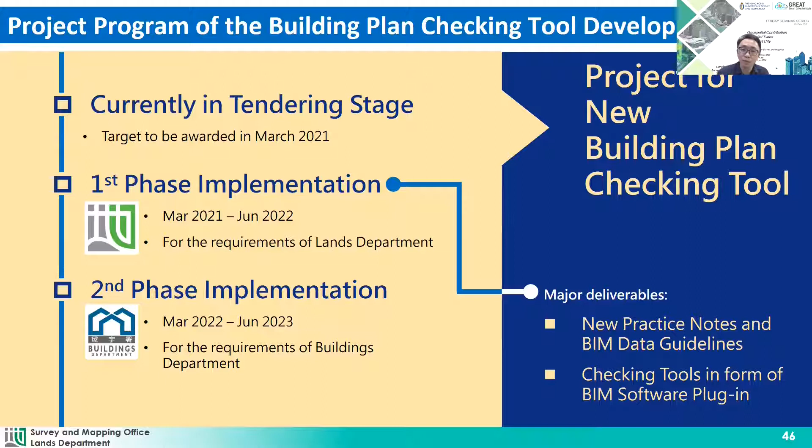Here is the high-level concept of the new building plan checking tool. As mentioned, new practice notes and BIM data guidelines for regulating GFA submission will be delivered, so developers can make use of the guidelines in preparing their submissions. A plugin tool allows them to check before submission whether there is compliance with our requirements. We hope that with these deliverables, the process and checking can be smoother and the time will be reduced.

So today we have shared with you the CSDI, which is the foundation and framework for managing spatial data. The 3D digital map is to provide a realistic and accurate city model for city planning and application development. The BIM data repository will provide rich context on BIM to better support the construction industry, and we would like to provide more information to the community to develop different types of applications. These components connect and work together to better support our community in developing different types of smart city applications.

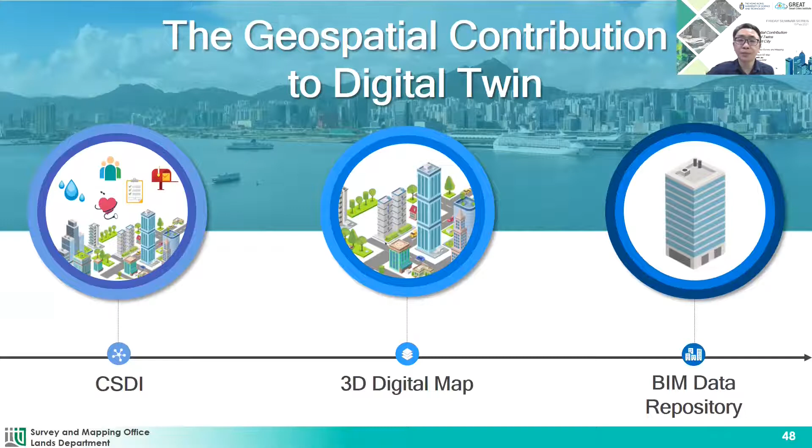We hope that we can get more feedback from the community, so that organizations like Hong Kong UST and academia can give us innovative ideas and advice on how we can better do our job and better support smart city development. Thank you.

Well, we really appreciate this team of three, very informative, and I'm very excited to see we are moving forward in a very fast manner. Hopefully in 2-3 years time, we have much more 3D maps and data to work with. With that, I open the discussion to the floor. Anyone from the audience would like to ask any questions? Or you can type in the chat if you prefer.

Maybe let me start the question first. Thanks for the very informative seminar, and thanks Spencer, Ben and Michael. I think we've actually discussed this offline already, and this is a very aggressive initiative. As mentioned, it is a very large scale project—Switzerland took 10 years to finish their whole 3D model. I think you've mentioned two main sides here: one is how to generate the 3D model, and one is how to distribute the 3D model for people to use. For generating the 3D model, to keep it short, it seems there's a plan of 4 years for the whole of Hong Kong.